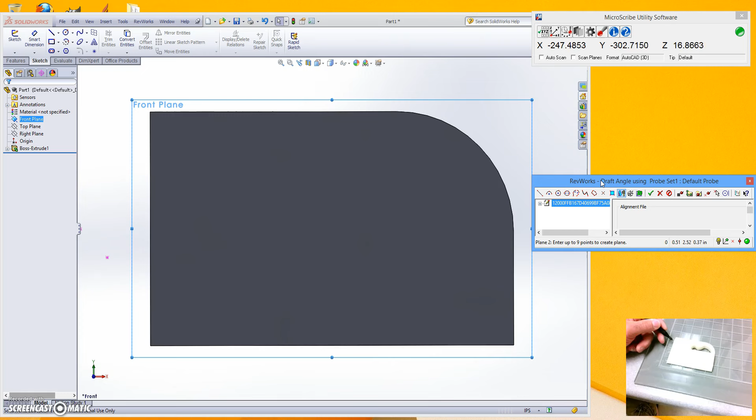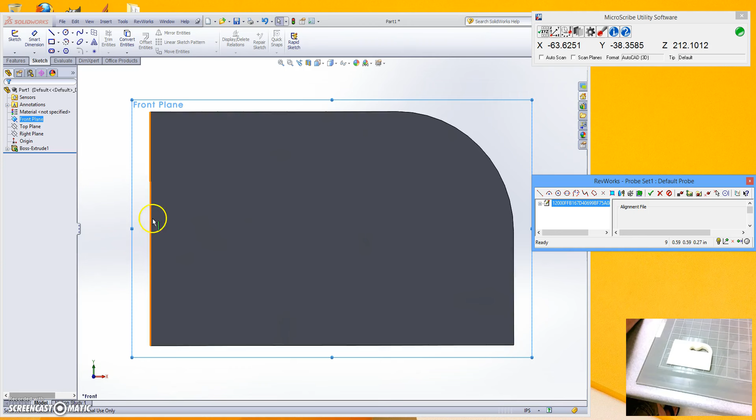I entered 9 points. And it measures my angle and puts that angle on the clipboard of 28.8 degrees. Okay, so now what I need to do on my sketch is go on this edge of my sketch. I'm going to rotate my object up so I am perpendicular to this side. And I have to cut a triangle off of here that has an angle of 28 degrees. So I'm going to go Features, Extruded Cut.

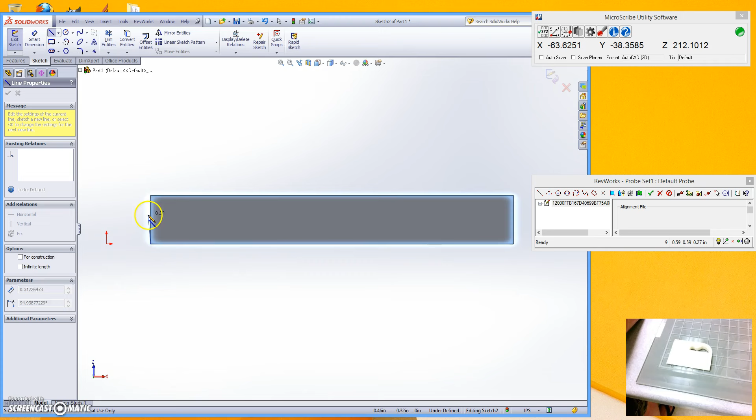I'm going to pick my line tool, and I'm just going to sketch from my origin here a triangle. Up to the top surface, over, and down. Okay. Then I'm going to go to Smart Dimensions. I'm going to pick this side of my triangle and this side, drag it up. And here is where I'm going to type in or copy and paste in that 28.8 degrees. And enter, and there's my angle.

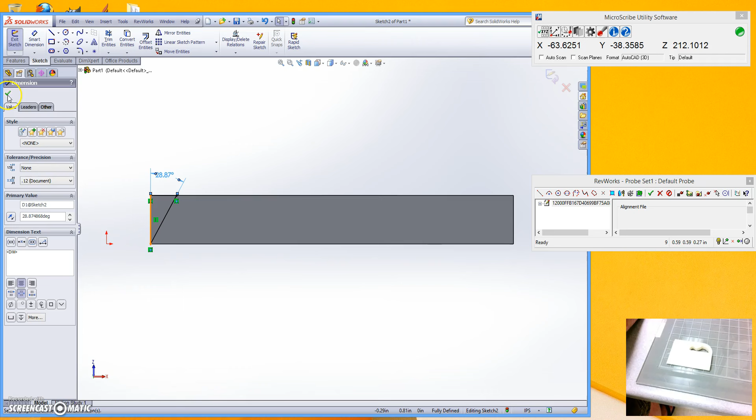Okay, so I can exit my Smart Dimension. And when I exit my sketch, that brings me into my Cut Extrude. And I'm just going to click through all, and OK. And there my edge has been cut off. Okay, so now I have that sloped edge. Now I'm going to rotate around to the same thing on this side.

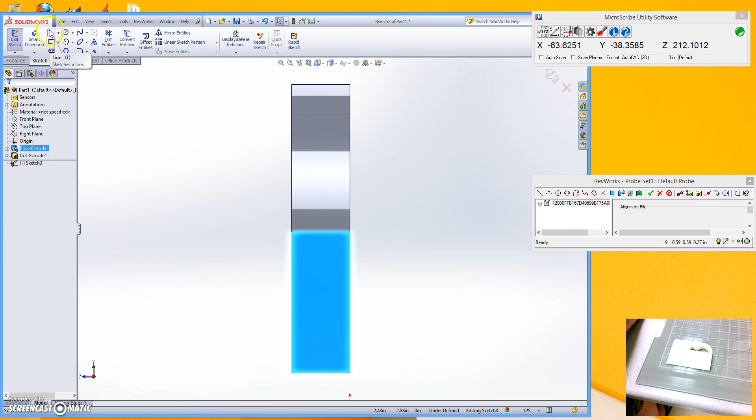And we want basically the same angle in this case. So I can turn this to be flat, or I can leave it like this. It doesn't really matter. But I'm going to extrude cut again. And we could check that angle and make sure it's the same. But it should be the same in this case, so I'm just going to use that same exact angle. So our sketch, we do a line again. We're going to sketch our triangle.

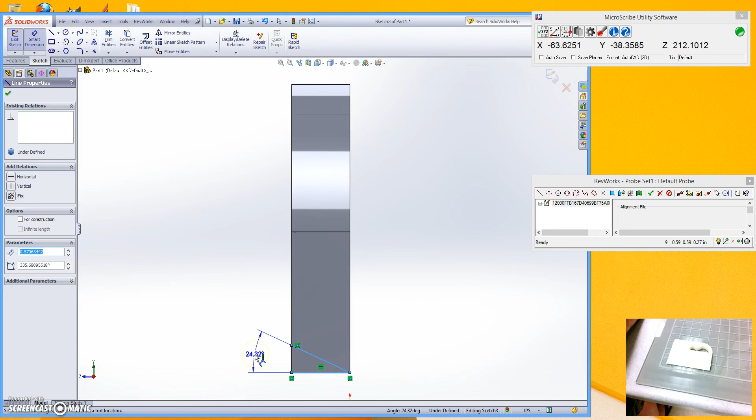We're going to Smart Dimension and get our angle in. So I click the two sides and drag out to get our angle measure. And Control V to get our angle. Okay. And then we exit sketch. Now again, we go through all for our cut and click OK. And there our two sides are now cut out as I rotate it around.

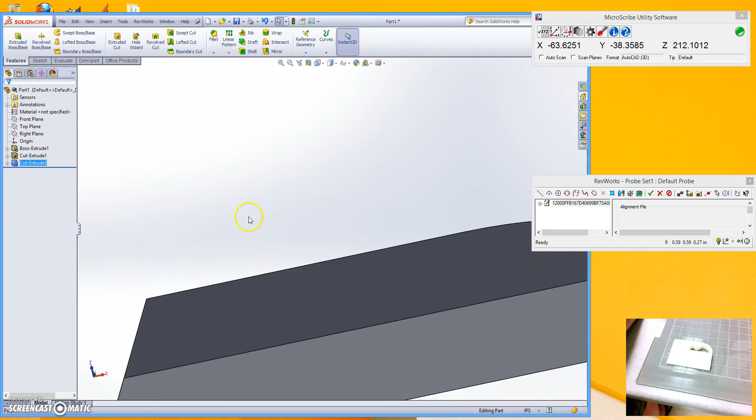Okay, so this side isn't flat and this side isn't flat. They're both sloped surfaces. Okay, that is the next part. Next video will be going on into creating our interior features on our device.